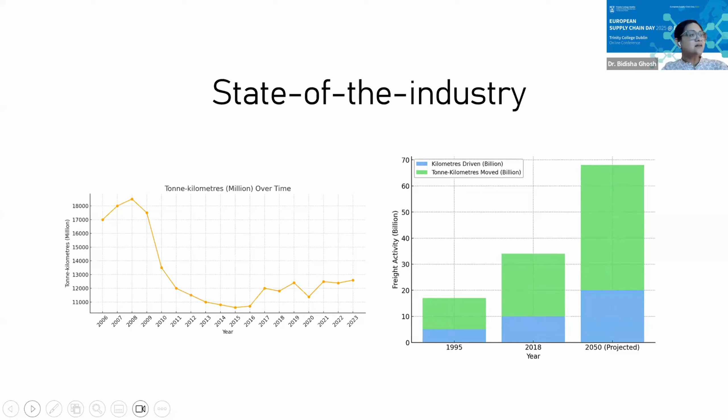I just want to mention one point - this project started in 2019, so a lot of the figures you're going to see are 2018 figures, which was essentially based on the availability of data. But in later projects, we will present some newer information.

These classes were introduced in Europe since 2000. So the initial classes were Euro 2, and then we had Euro 3. This is also connected to the year of registration, or the year in which the vehicle was introduced. So we do see that from 2015 onwards, the vehicles introduced are falling into Euro 6 classes.

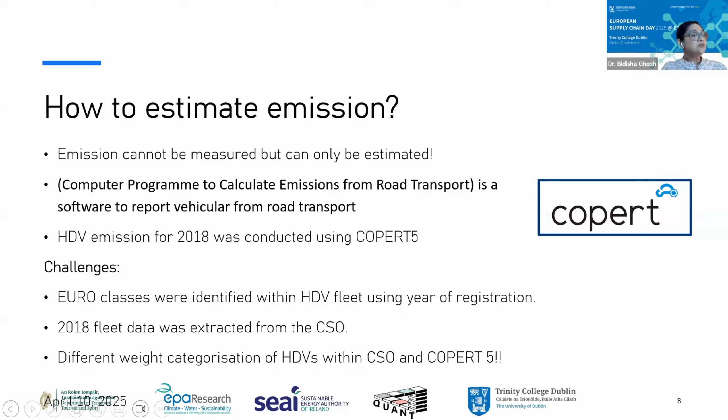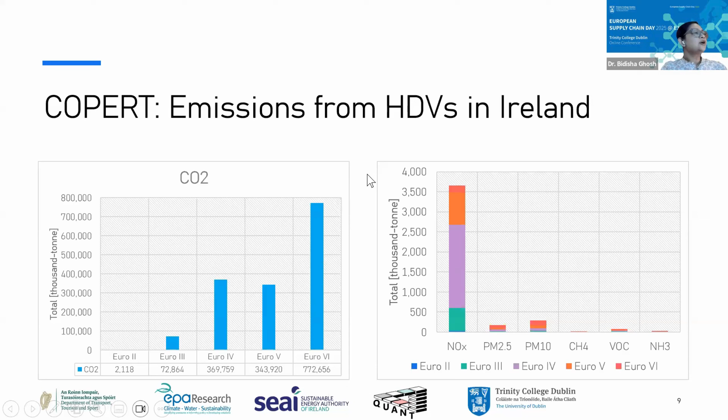Also, the way COPERT calculates emission couldn't be followed directly because the weight categorization with which the data is recorded in Ireland is different from what COPERT uses. So these were some of our challenges, and after dealing with them in some way, we came up with these numbers. As you can see, in 2018, the Euro 5 and Euro 4 vehicles were the dominant ones in terms of NOx pollution, and in terms of CO2 pollution, we do see Euro 6. Just one thing to note here, it was 100% diesel vehicles. All the trucks were diesel at this stage.

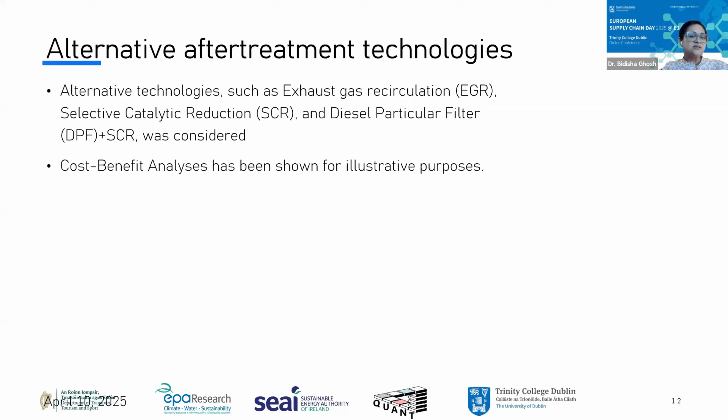The mitigation measures that we looked at were alternative fuels, alternative technologies, eco-driving, loading, etc. These were the measures that we identified. That was the first stage for the MAPHDV project. We looked into alternative after treatment technologies, and we looked into cost benefit analysis of retrofitting existing vehicles to make sure that they pollute less. In this case, we figured out that SCR technology is only effective in Euro 6 trucks, otherwise it's exceptionally expensive. So these kind of things are essential to really motivate the sector or the hauliers.

One of the things we carried out first time in this country with MAPHDV and ECOHDV project is dealing with the freight owners or the freight forwarders or hauliers, and we worked with IRHA, and we carried out in-person interviews with the haulage companies, and we tried to figure out what are their thoughts on decarbonization, what is the state of the art in their own companies or agencies, and what kind of incentives they use, and so on.

And the most amazing thing about these projects was that a lot of this work was taken up in policy implementation very quickly through the Road Freight Forum or the Department of Transport, which I think is a major success for the project. The next project that we worked on was ECOHDV. In this one, we were particularly focusing on eco-driving potentials of Irish HDV vehicles. And in this, we looked at many different things. I'm going to only focus on aspects which are related to individual vehicles, smaller areas, roadway characteristics, and so on. So we start with the VISSIM simulation, and this is used to model real-world traffic conditions.

It is a well-known microscopic simulation tool where movement of individual vehicles are modeled through road sections which are taken from either GIS or GPS data or Google Earth or that kind of detailed road network. We modeled the port area in VISSIM and tried to figure out things like fuel consumption, emissions, and travel time. This is a very well-used tool in Ireland; when we modeled Luas, the impact of the Luas introduction was modeled using VISSIM as well.

So there was a video, but just for the sake of time, I will move on to the next part.

We also did some work on GLEC, which is fuel economy benchmarking, to get a sense of where we are in relation to fuel consumption in this sector. With the haulier companies, we surveyed 12 haulier companies who helped us to get their data. We looked at the min and max fuel consumption in liters per 100 kilometers, and you can see the mean fuel consumption.

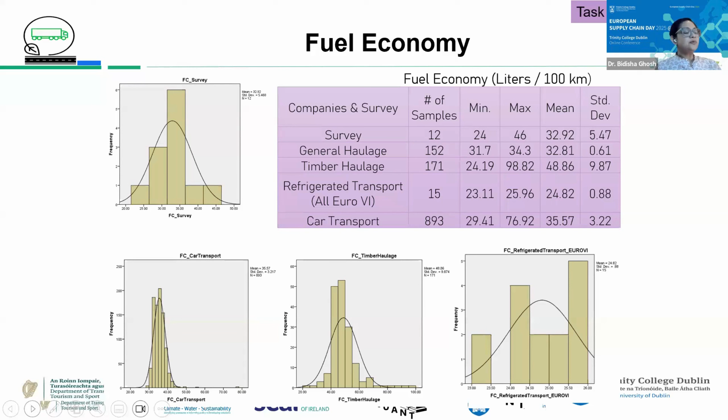As I mentioned, we do see a significantly high consumption in certain sectors. You can assume 30 is the EU average for fuel consumption, whereas in some cases in timber haulage we have seen 48.86. Now, this is not the norm, obviously, but the main profit margin for hauliers is fuel. So this is quite a problematic situation.

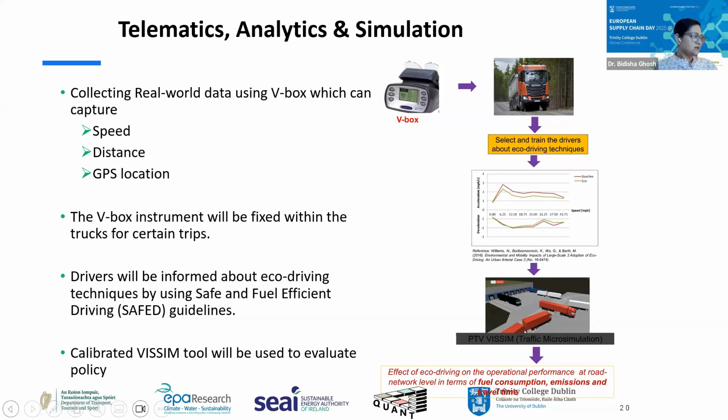The next thing we did was using telematics and analytics for simulation. In this case, we used a tool called VBox, which is very popular in collecting naturalistic driving data, especially for trucks. We attach this instrument to a truck, the truck driver goes around the country, and we measure speed, distance, GPS location, acceleration, torque and things like that. We collected a significant amount of driver performance data, and we processed the data to get some sense of their acceleration, deceleration behavior, and so on.

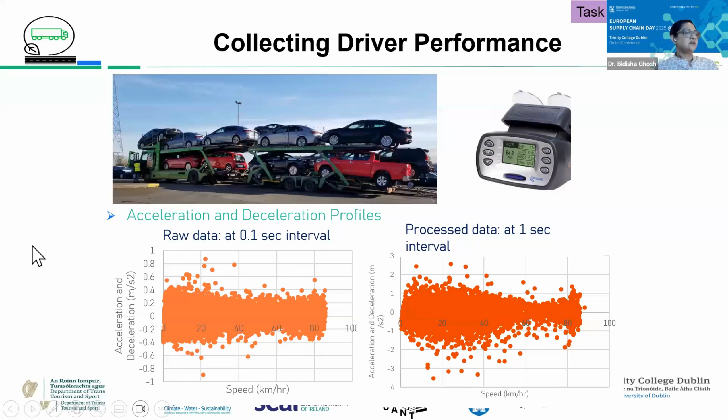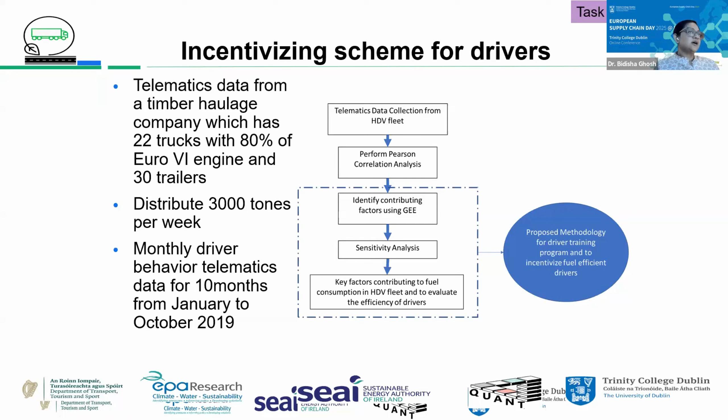With this, we came up with an incentivizing scheme for drivers. We used the telematics data from the timber haulage company, and using an academic method, essentially a statistical method, we came up with a tool with which the companies can incentivize their drivers for improving their fuel consumption. This paper was published in Transportation Research Part D.

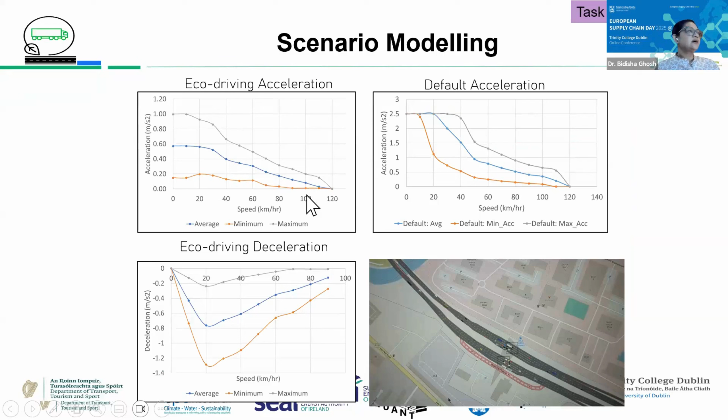Eco-driving helps us to reduce fuel consumption. We figured out that if HDV priority signals are introduced in intersections where we see heavier freight activity, we will see a reduction in CO2 emission. Similarly, if we have barrier-free tolling throughout the areas where freight movement happens, we will see a significant reduction. And with the eco-driving training program, using the data we measured from naturalistic driving with the telematics or VBox, we did see the effect of eco-driving in the simulation.

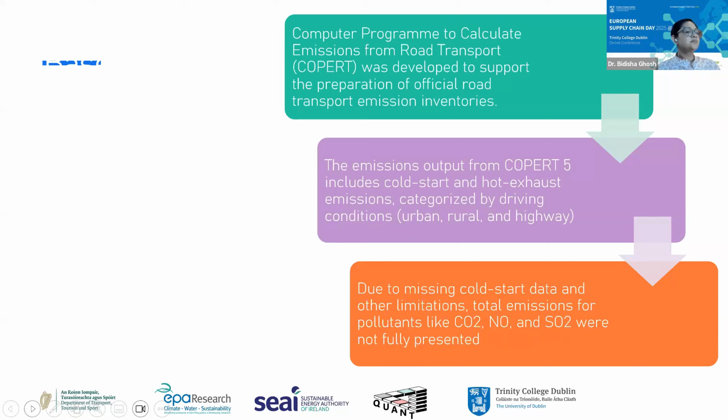One of the issues that we noticed with COPERT is that it doesn't take care of cold start data, and it has some other limitations, like total emissions from pollutants like CO2, NO, and SO2 were not fully presented because of the missing cold start data. These are our figures. As you can see, urban off-peak and urban peak are the major areas where we see significant energy consumption. Energy consumption is a surrogate or proxy for emissions, NOx and PM emissions. So the more fuel is consumed, the more pollution is emitted to the environment.

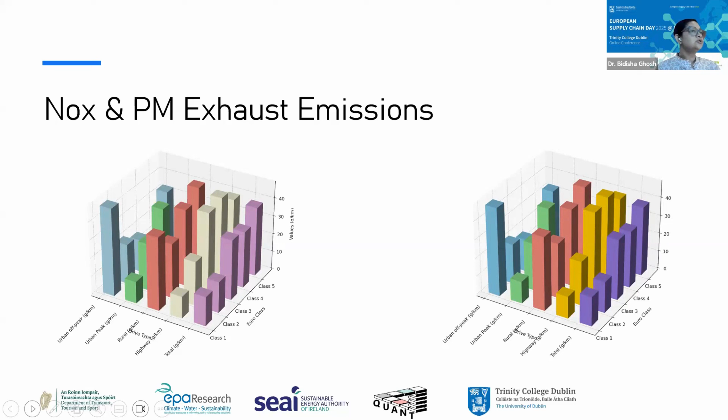Then we moved on from COPERT to an even more detailed approach. In this case, it's probably worth spending a few seconds, considering we have very little time, on this particular approach, the microscopic approach. The microscopic approach looks into individual vehicles. The study of traffic can be divided into two paradigms. One looks at vehicles in aggregate, bringing all of them together. The other looks at vehicles as individuals, looking into individual driver behavior and individual vehicle characteristics.

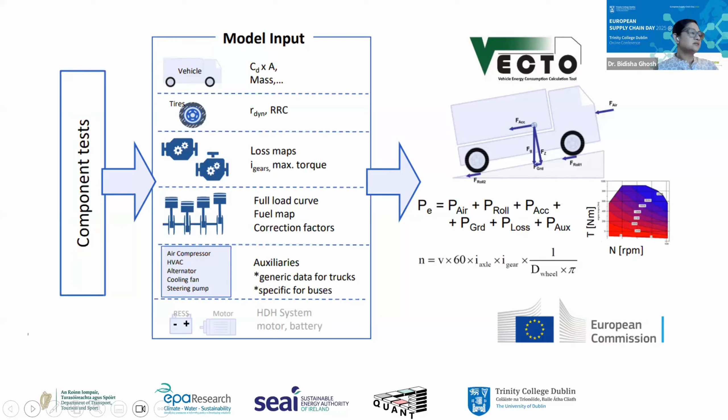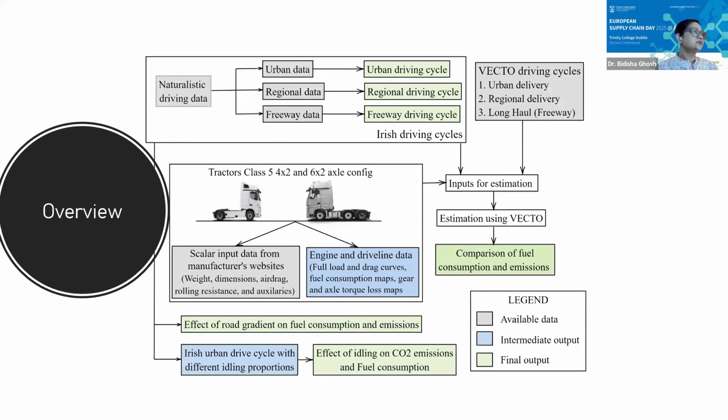There is another tool developed by the European Commission called VECTO, the Vehicle Energy Consumption Calculation Tool, which can be used in the freight sector for calculating the emissions coming out of individual vehicles, considering all their engine characteristics, maintenance, and so on. This was what we were looking at. At this level, we decided that rather than using the European drive cycle, which is essentially what we use for testing vehicles for their emission standards, we would use an Irish-specific cycle.

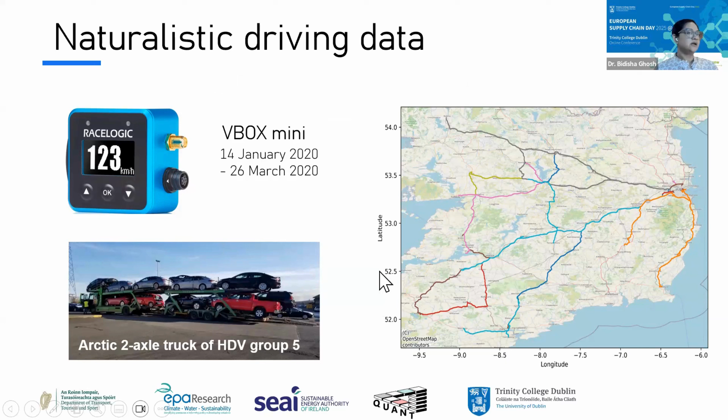So the first step was developing the cycle. We again went back to our data set, which we collected between January and March 2020 on these routes, and we processed this data to develop a drive cycle, essentially how people drive in Ireland. We divided the data set into freeway, regional, and urban, and we developed the drive cycles. And this is what we see, how it is distinct from European driving behavior.

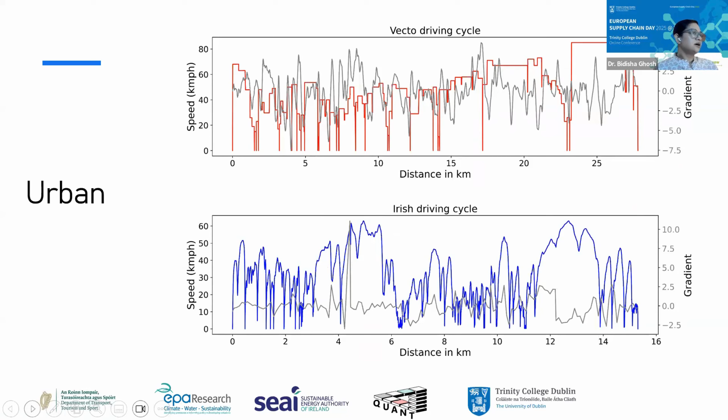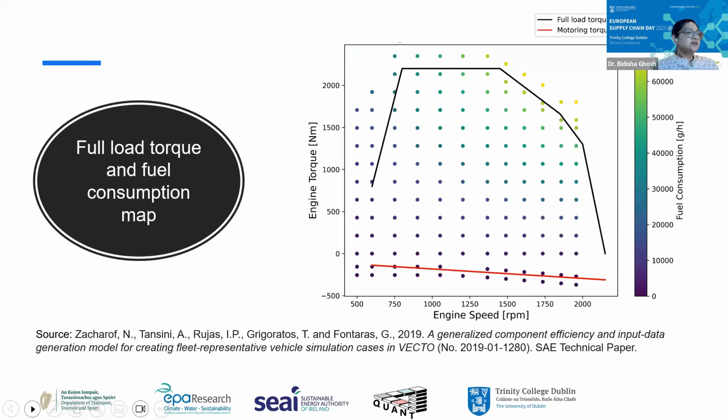The blue and red lines are the drive cycles for the urban situation. VECTO is the red one, and blue is the Irish one. We see the same for regional driving and freeway or highway driving. We worked with existing engine specifications to develop our full emission results. In this, we can figure out what percentage of time individual vehicles spent in different gears, fuel consumption, CO2, simulated versus observed fuel consumption, and so on.

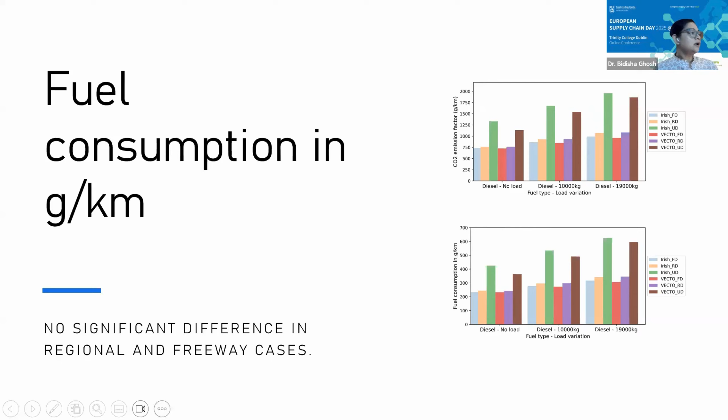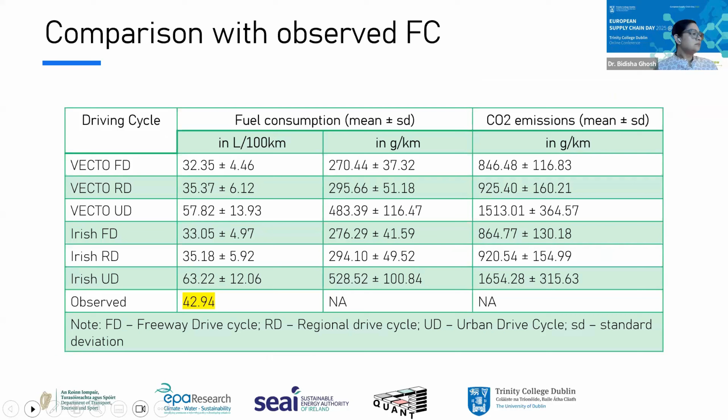And these are our results. As you can see, in the Irish drive cycle in the urban setup there is a difference with the VECTO drive cycle, which is represented by the brown bar, but there are no significant differences in regional and freeway. So the main high fuel consumption we see on Irish roads is actually happening in urban areas, and measures to reduce that will really help.

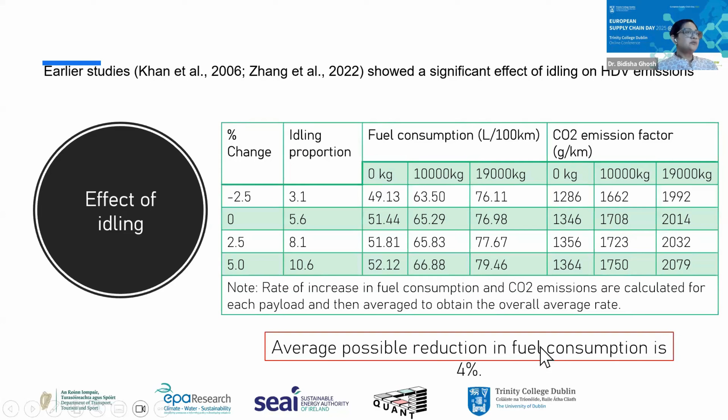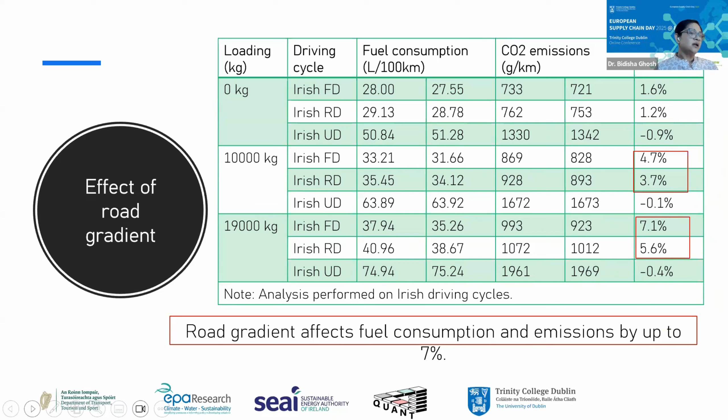Apart from that, we looked into the effects of things we identified in the MAPHDV project, like a possible reduction in fuel consumption by reducing idling. There is around a 4% reduction in fuel consumption. Then there is a possible reduction in fuel consumption from the effect of road gradient, so driving on roads with lower gradient variation will definitely improve fuel consumption. All this has been published in a paper in Transportation Research Part D.

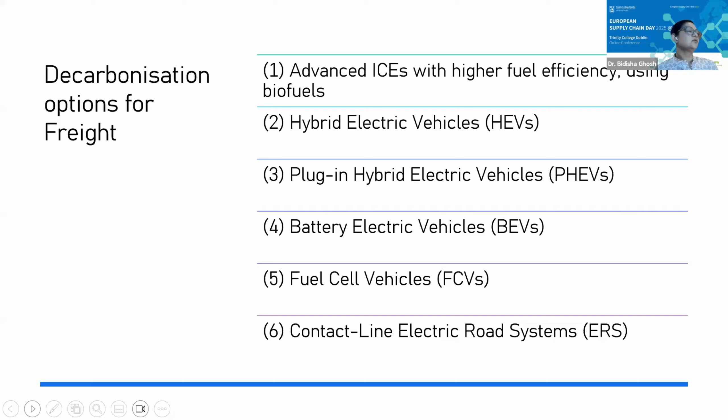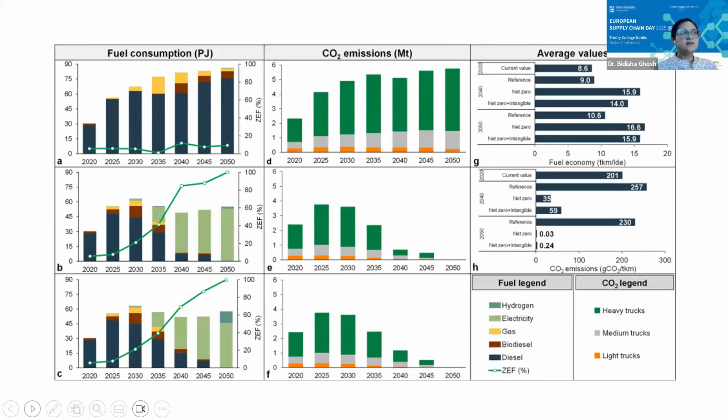The main recommendation from the DRIFTHDV project is that it is important to develop drive cycles for Irish conditions. Idling and gradient have a significant effect, and the influence of zero-emission BEV trucks is important, but cargo capacity and recharging time affect them.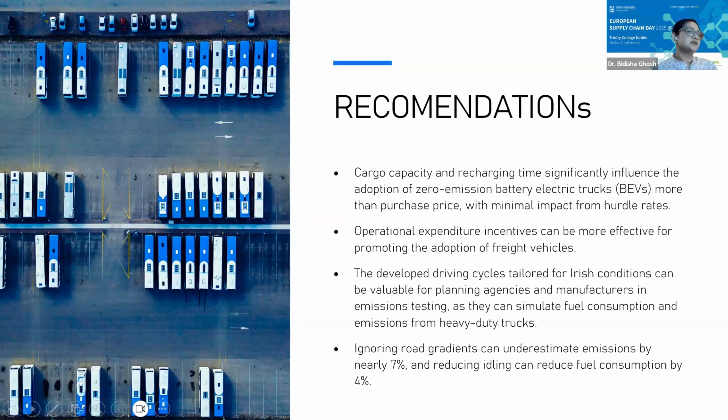Concluding the presentation, sorry, I'm rushing a little bit, the key things from these three projects are that we want to see a significant increase in data collection, and I know from personal experience that the Road Freight Forum and the Department of Transport are looking into it. Transitional and softer measures such as eco-driving, barrier-free tolling, and after-treatment can help with some reduction in emissions. We cannot reach our targets fully with those, but they can help in the transition.

We need further research to develop policy and create an evidence base to understand how these will have an impact, or how we can reach our net zero future. And it is very important to support the hauliers, who are crucial in actually achieving these targets by taking up the policies. And that brings me to the end of the presentation.